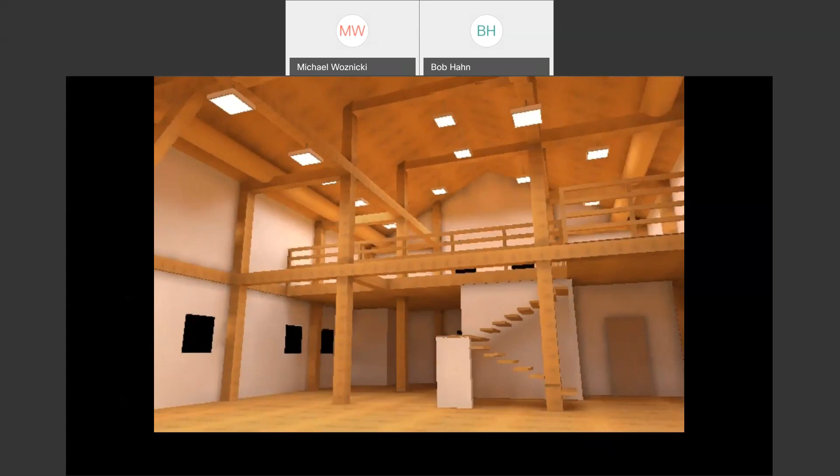Here's an example of some of the abilities that we have with current lighting software. This was a project that we looked at. They had tried several lighting solutions, and we were able to go through and do a full analysis and create a rendered animation to really flesh out and give a very strong idea to the end users of what their space would look like when it was completed.

So that roadmap, as I mentioned, I broke this down into 3 sections for you. We're going to start out the presentation today talking about the control of LEDs. Not only do they have a great efficacy, but we really have an enhanced ability to point the light where we want it to be. We're also going to spend some time talking about the clarity of light from LED and specifically the quality of light, how that is perceived and used by a human observer.

And then at the end, we're going to talk about confirming, really getting into how lighting software can be used on the front end of a project to specify, make sure you're using the best luminaire for your project that gives an overall aesthetic ability to perceive objects in a manner of safety, and also how all this can be done on the front end without cost or commitment.

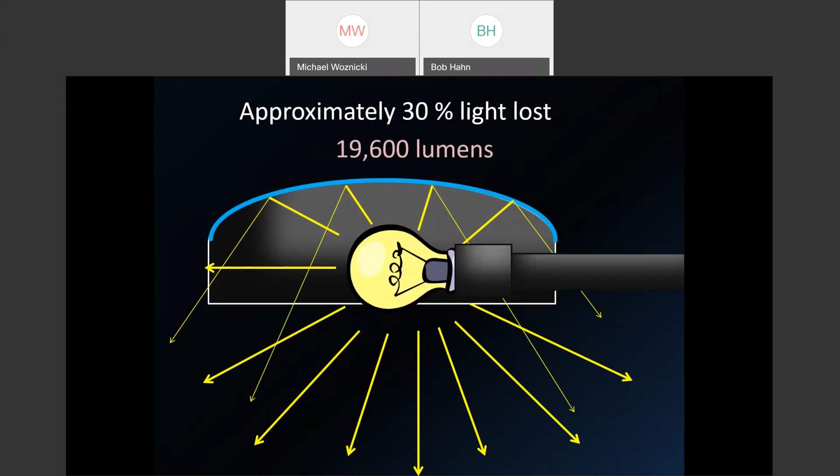And so if you look at a cut sheet for some HID sources, you'll see that when the light's being redirected, that's not accounted for. It'll be rated at, say, 28,000 lumens. But you're going to have between 20 to 30% light loss as it absorbs, and that rating is only accounting for the lamp itself. The actual delivered lumens on day one are going to be substantially less. And so this is an important thing if we're looking at apples to oranges in comparison with traditional to current forms of technology.

The solid state semiconductor light, of course, you have a substrate with material where the LED is on the backing, and the light is all projected forward. Now, most encapsulant lenses have a range of 180 degrees beam spread. Now, of course, we have a lot of variety with that. We're certainly proud to use 20-degree beam spreads for flag lighters to really harness that in a direction.

Now, of course, sometimes you also need to have light in a wider spread. We have options that we can do right from the point source of the illumination. And so with optics, what we can do is actually point where we're putting the individual portions of light and get a smooth illumination across the surface. We have a lot more control than just shoving and blocking the light around with reflectors, which are also, of course, absorbing some of that light. We can get very specific.

If we take a look at a roadway, we can use a type of distribution and optic package that's going to get a very wide linear spread without pushing a lot of light forward or backward. So we can spend all of our energy lighting up the roadway, and of course all of the costs associated for that energy, and that will be minimizing the amount of spillover light on the grass. Unless, of course, we want to have light in a different pattern.

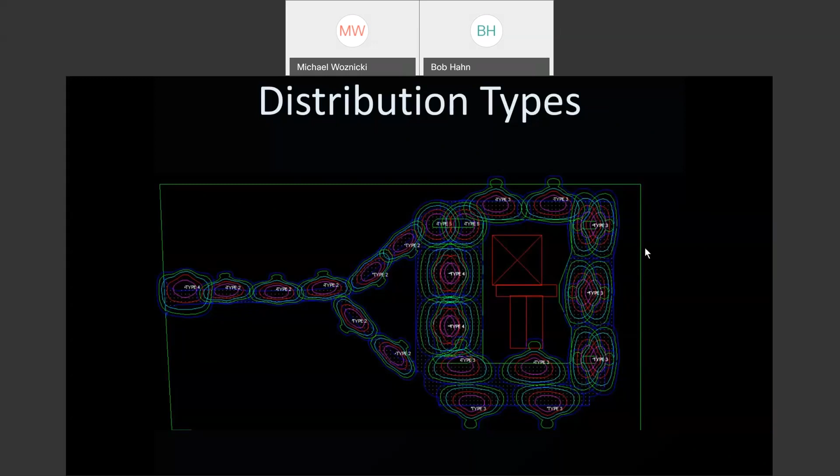So simply by using optic packages and harnessing and controlling the LED light without having those lumens absorbed by reflectors or a specular surface, we were able to have all the delivered lumens more appropriately placed, which has been a really fantastic advancement as far as getting not only uniformity, but great aesthetics throughout a project.

Here's an issue why uniformity is such a critical staple for recommended lighting practices, particularly those put out by the IES, the Illuminating Engineering Society. So, of course, most of you understand that when light comes into an eye, the pupil is going to open up and dilate to allow more light in. And in brighter conditions, of course, it's going to constrict to filter out excess light.

Now, if you have a situation where you have a driver moving through, say, a parking lot, which has wide pole spacing and high intensity lights, you're of course going to have hot spots, if you will. The brightest part is going to be directly under the poles. And in between those pole spacings, it'll be darker. And so as the driver moves into a dark spot, all of a sudden the eye starts to have to work and constantly make micro adjustments multiple times per second as it moves through an area.

Ultimately, that's a distraction, right? Most of the people driving at night, the large majority of them have been up through the daytime. They're already getting into some fatigue. And if you're moving through a parking lot, having an added distraction really gets compounded as far as a safety and security issue. And of course, this is talking about a regular pedestrian, but if you have children in a parking lot, below 4 feet, the last thing you want to have is fatigue and distraction. Everybody needs to be illuminated clearly.

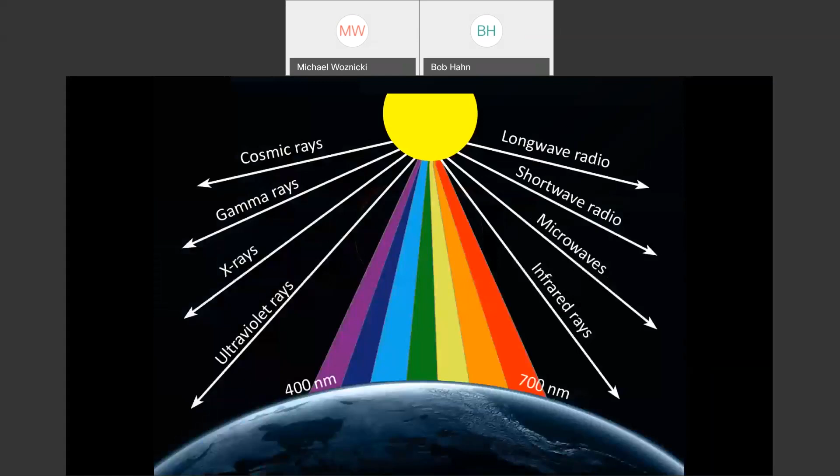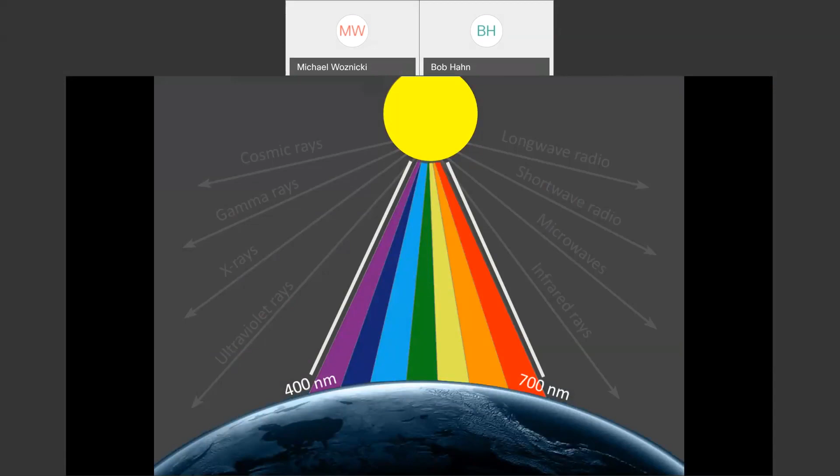So taking a look at how effective that light is being used, not only with uniformity, we're going to take a deeper dive into specifically the color rendering index and color temperature of what you can expect from LED fixtures. Now, usable light, as I mentioned previously, is all within a range of 400 nanometers in the blue zone up to 700 nanometers, a little more in the red area. So that's our second portion, talking about the clarity that you can get from LEDs and the quality of light.

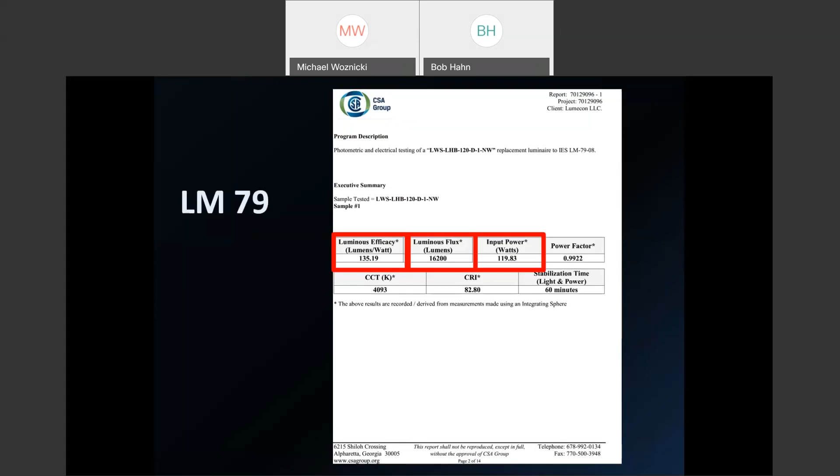If you have, for example, an old HID fixture of 400 watts, pretty common, they also have a ballast, and that ballast would draw approximately 40 to 42 watts. That's not recorded on the cut sheet, and so when you're looking at a very specific number on a large scale to get an ROI, you need to know exactly how many watts you're actually drawing. So all of that data is critical, and of course, this needs to be tested independently.

Of course, when they're testing a fixture, they have an integrating sphere which has thousands of sensors all on the inside. And there's a specific document put out by the IES, a 16-page memorandum of the procedures that need to be followed for testing an LED luminaire. One of which is that they have to turn the fixture on for a specified amount of time before they actually test it, so the heat can stabilize and it can settle in.

And then, rather than just a lamp, they have to take the entire unit and put it inside the integrating sphere. You can't just peel off the LEDs themselves because they won't function for very long. So when it's in there and it's operating, all of the light is coming out from the luminaire in many, many different directions with different intensity for specific directions.

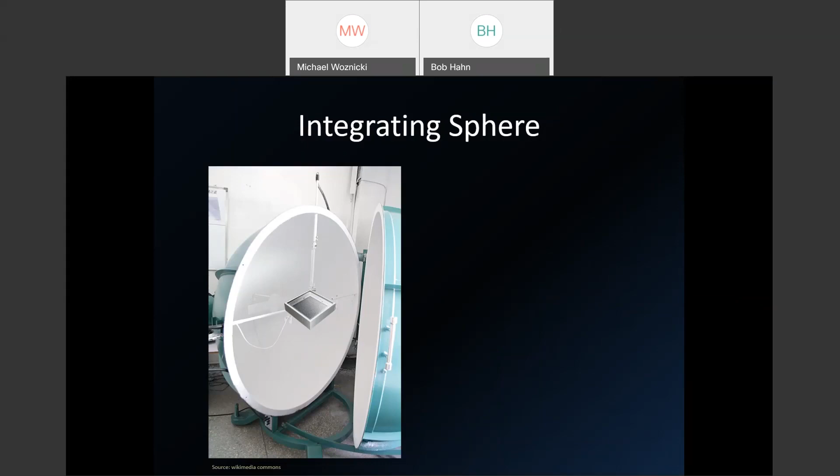And all of that data gets picked up by the sensors and recorded, and there's a specific format for how all of that has to come out in LM63. And this is the very accurate data that reflects how the light operates.

Now, of course, the vast majority of people will just look at numbers. That's not easily interpretable, so we don't have to go through it that way. I mean, it's already 2020. We can just use software and build a model to really render out the entire area.

Now, we're proud to use AGI 32. They're a fantastic company that has been leading lighting software for well over 35 years. It's top flight stuff, and it does some excellent work, and it's CAD-based. So it's great if we have projects that have CAD files; we can immediately incorporate those in and get a very streamlined approach.

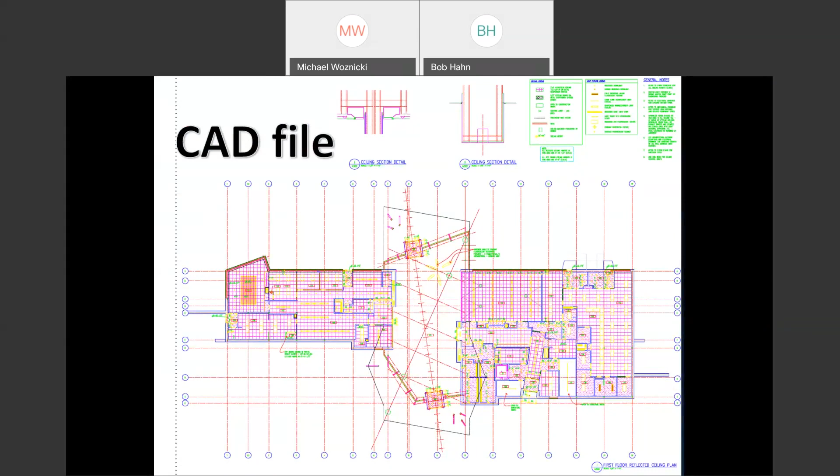But, I mean, let's be realistic. If people are changing over infrastructure of old HID lighting to LED, it probably wasn't designed in CAD. We have some old PDFs. A couple times I've actually got to work with actual blueprints, like Wile E. Coyote type stuff, that are out there for electrical drawings.

And most commonly, if it's an outdoor lighting project, an address is usually about all we need. We can go on Google Earth with satellite imagery, get specific measurements, also get some dimensions of buildings to really help get things filled out, and then we can just start working from that.

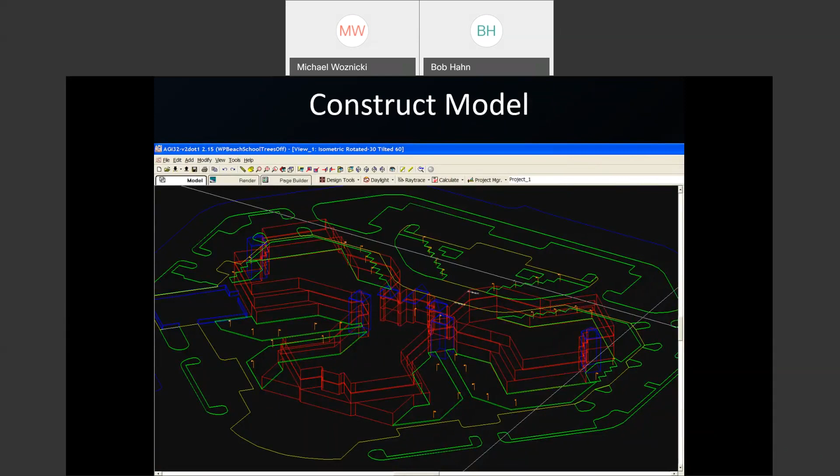And then within the lighting software, we're going to construct a model. We get all of the portions blocked out as far as asphalt surfaces, parking islands, building heights, and all of that gets carefully recorded and built.

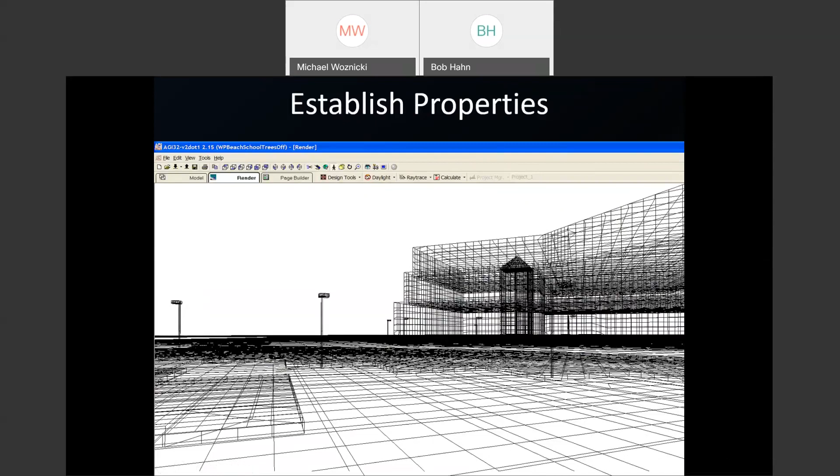And then we have to be specific, because if a building is right next to a parking lot we're trying to illuminate, it's going to have a big impact if it's painted white or if it's very dark. And so we have to establish those properties to see how it's going to have an impact on the light that is reflected and bounced back into the illuminated surface.

But that's not enough. We have to get really serious, because if we're having a luminaire that has a lifetime that's rated in excess of 10 years, closer to 15 years, there will be some lumen depreciation over that time. It's just the nature of the physical components of solid state technology.

It will diminish. And so we're going to look ahead and account for that, say, rather than give you a day one rosy scenario, how is your fixture going to perform 11 years down the road? And we will degrade the luminous output appropriate to that.

And then we're also going to be realistic, because dirt compounds are circulating throughout the air. They accumulate on the lenses of fixtures, and with enough dirt buildup, it absolutely will impede the light output of a fixture. Nobody's going to get up on a lift and start power washing area lights in a parking lot. That doesn't happen. So we want to be realistic and say, here's an additional portion that we're going to degrade the light output.

And then we're going to fly solo. For example, if we're doing a photometric analysis of a parking lot and it's in an area next to a road and there's a couple businesses around, well, most likely there will be ambient electric lighting coming in. But we're never going to take that into account when we're trying to hit our minimums, because you certainly can't predict the future.

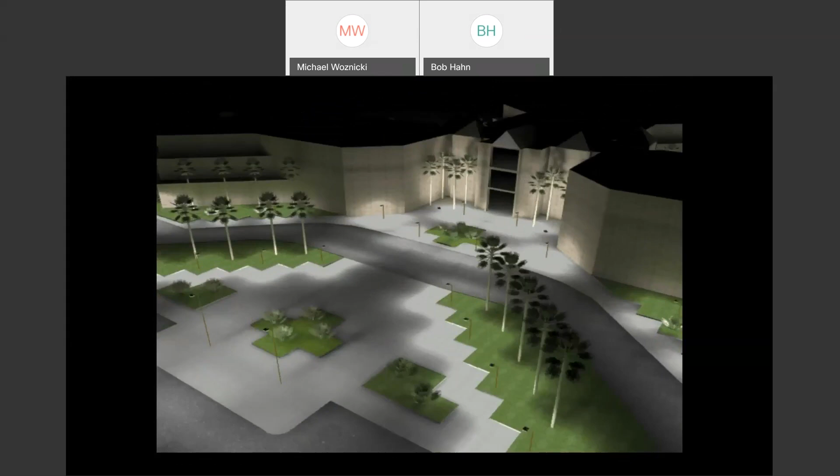For example, this is a school administration building in Florida. They were looking at a proposal to replace their luminaires one for one on the existing poles and spacing. And so by developing this, we were able to put this in front of decision makers and say, here's what your facility would look like. And of course, we made sure that we were meeting up with recommended practices. But again, the people who are on the decision-making board, the municipalities, were able to look and go, oh, this would be well lit. I know what my project would look like. So it's been really fantastic to have people make a more informed decision.

But again, not to skim past it by any means, we always look at what standards we're going to be meeting in every situation. A lot of times there are lighting ordinances. There will be zones or codes that have specific requirements for lighting. And a lot of times there are not. And so if those aren't readily available, at a very minimum, with every single project, we have a target to go and look for the recommended practices as established by the Illuminating Engineering Society. Now, a point of distinction, they are recommended. They are not a legal requirement, but here's why we go to match those up.

Let's say there's a situation in a parking garage where there's an accident and it gets into litigation. Well, certainly one of the first things that's going to happen is a lawyer will come out at night with a light meter and start taking readings of all the light levels. And they'll consult, if there's not an ordinance, at a bare minimum, what the IES recommends for parking garage lighting. And so if we have designed it, several years down the road, to exceed those recommended practices, well, then it is incredibly difficult, if not impossible, in a court of law to pinpoint the lighting as being culpable for the accident. That's just not the case. So it's not a legal requirement, but it absolutely minimizes liability.

Some of those standards we'll take a look at here for a parking lot in RP-20. This also applies to parking garages, as we were talking about. We have a maximum uniformity ratio of 20:1. And this is because people are certainly moving at much slower speeds than they would be on a roadway. But on a roadway, it gets much more specific. Certainly recognize that you are moving at a much different speed in a subdivision as opposed to a collector road through a downtown area or certainly on a freeway.

So they break their matrix into different sections. And then once you pick what area, what type of road it's going to be, if it's a major road, for example, you also have to consider how much interaction there will be with pedestrians, people crossing the street. Obviously, with most expressways, it should be low to none. But in a downtown area, in a collector, you have intersections, generally pretty high. So that's an establishment that we have to take as far as the lighting. And then from there, we're going to take a look at the pavement classification. Is it concrete? That would be R1, as it's going to be reflective.

But if it's asphalt, that would go in the next section. And specifically, they want to know how much aggregate is in that asphalt. If it's a lower amount of aggregate, that would be an R2, but a higher amount of those stone chips and other particles in there actually reflect quite a bit of light. And so that has to be taken into account for the lighting schematic.

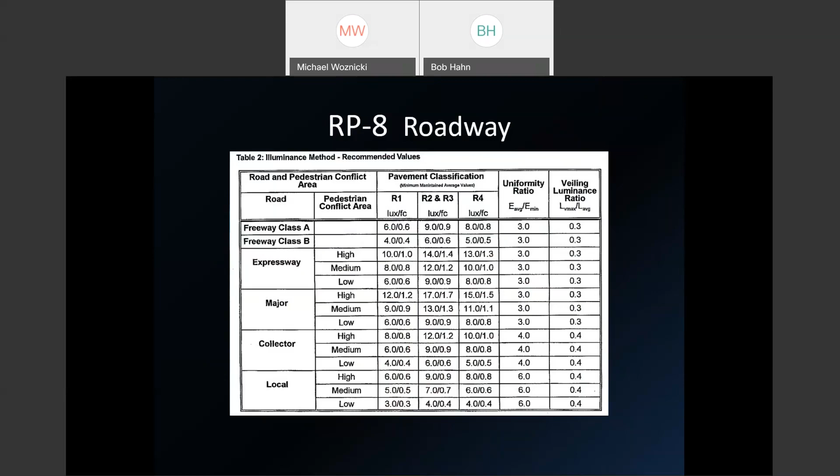And then right after that, as I mentioned previously, just as important as everything else, given the same weighted criteria, is that uniformity ratio. So if we're looking at major roads, for example, with a high conflict, you'll see 3.0. And it's the average to minimum requirement. What that means is the average of that entire roadway can be no more than 3 times as bright as the very lowest single point that's recorded in that area, which is a strict requirement. Again, this goes back to recognizing that as people move through a space, a smooth, uniform illumination definitely has a strong advantage for safety.

But it's not just roadways as well. We get very specific about how an environment is broken down according to its use. For example, a gymnasium at a high school will require 50 foot-candles on the surface. If it's college, they require 75 foot-candles. And if they're broadcasting on television, they want 150 foot-candles out there. So we have to adjust for the use.

Another point as well is inside of an office space. This is a project we looked at, and the requirement was 40 foot-candles on a desk surface. And even back in the 1940s, the IES recommended 40 foot-candles on a desk surface. But in the 1960s, they had adjusted that and required 100 foot-candles on a desk surface. For most people, that sounds like a lot. That's personally my preference. But currently, the IES recommends 40 foot-candles.

And I think there are probably two reasons for that. One is technology. Not only is there more of an emphasis on task lighting, but realistically, the majority of people in an office situation are working on computers and laptops and monitors that are self-illuminated. That's its own source of illumination. So you just don't require 100 foot-candles to be able to see clearly what you're doing. And the other point too is that honestly, it's just simply subjective.

So talking about a lot of the numbers today, clearly lighting is very much a science, but it is also an art, because at the end of the day, we're talking about how an individual, a human being, perceives an environment. And there are trends and tastes and subjective preferences that come into play. And so throughout that, the IES is continually assessing, reassessing, and advancing their interpretation of what are the current accepted levels. And this is not something that is done every decade or so. They're consistently moving through all sorts of inputs.